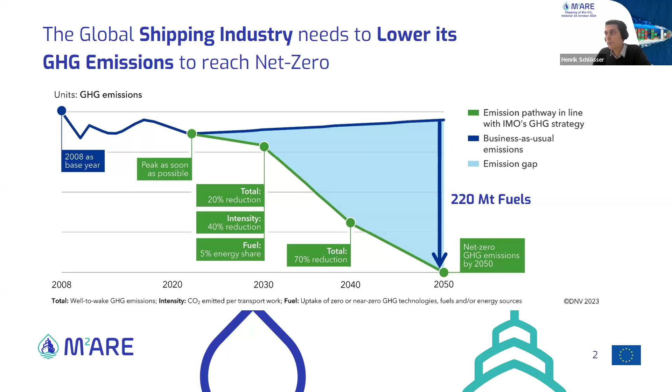And of course, this creates a huge demand for renewable fuels that replace existing fuels based on fossil resources. By 2050, it is estimated that a total of 220 million tons of fuels per year are needed, which creates a huge market for these novel fuels, but also requires the availability of new feedstocks, which are renewable. And we believe that methanol can play a key role here as one of the fuels to be used in the future.

So methanol is a relatively simple molecule, and it has the advantage that it has a much lower environmental risk compared to conventional fuels, so heavy fuel oils or diesel, for example. And by switching to methanol, up to 80% of CO2 emissions can be saved. Currently, we see a stark rise in the interest in methanol. Just 3 years ago in 2021, there were less than 20 ships on order capable of running on methanol, while now there are over 200 ships on order and able to run in the coming years on

methanol. But of course, one of the major challenges for methanol as a maritime fuel is its price, especially for renewable methanol. And there, we think M²ARE comes into play. We want to reduce the cost following this approach. We have partners along the whole value chain, starting from the feedstocks all the way to the final products.

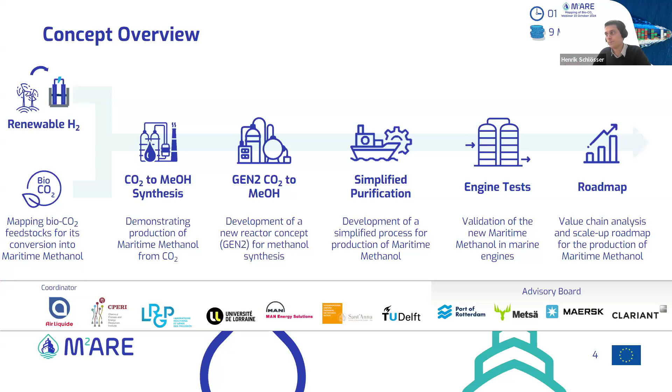And so without further ado, I want to leave the floor to Michael for the in-depth presentation on the biogenic CO2 sources in Europe.

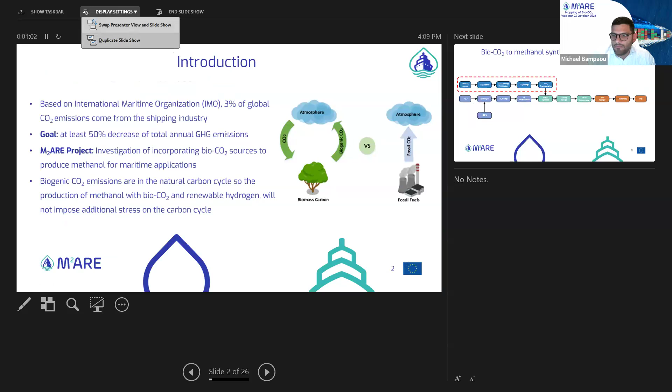Starting now with a brief introduction. So, as also Henrik mentioned previously... Michael, maybe you can switch to the presentation mode. Okay. Yeah, swap presenter view. Now? Yes, great, perfect. Thank you. Great.

Okay, the goal regarding the maritime industry is at least a 50% decrease of the total annual GHG emissions. So the scope of the M2ARE project is to use bio-CO2 in conjunction with renewable hydrogen to produce methanol that could eventually be used in ships. So why biogenic CO2? Because this bio-CO2 is in the natural carbon cycle, so we will not add additional stress to the carbon cycle, contrary to fossil CO2, which adds additional stress to the carbon cycle.

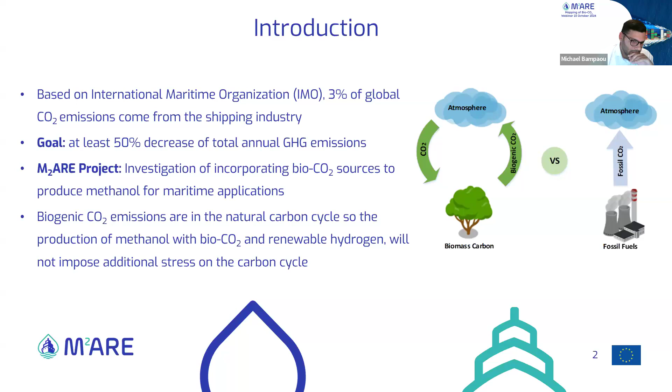So having this in mind, here you can see an overview of the bio-CO2 value chain to methanol synthesis. We have 4 different sections here. We have the bio-CO2 section, on which we are going to focus today, which is about the bio-CO2 emissions, the capture, the cleaning, storage, and then the transportation of the CO2. Then, of course, we have the production of hydrogen using renewable energy sources,

the synthesis of methanol incorporating renewable hydrogen and bio-CO2, and finally, the utilization of methanol in ships. So the port would be, let's say, the end user that is going to use this methanol, so the vessels that are located in the port.

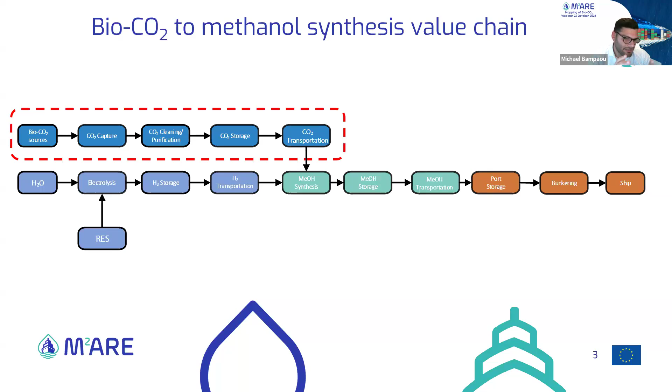So which are the 3 main biomass conversion processes that are generating bio-CO2 mainly as a byproduct? We have 3 here: combustion, digestion, and fermentation. The combustion process involves the combustion of the feedstock to produce heat, electricity, or combined heat and power. There are different solutions for this application, ranging from domestic heating up to district heating and large-scale power generation.

But usually the bio-CO2 streams from the combustion process involve low CO2 contents, lower than 15%. They have high inert contents like oxygen, NOx, SOx, and other traces that are related to the process and the feedstock. The combustion process is the main emission source in the biomass power plant sector, but also in the pulp and paper industry.

The digestion process is a biochemical process that breaks down the organic materials, which is mainly used to produce biogas and digestate, mainly in biogas plants. The feedstocks there could be biomass, organic domestic waste, manure, sludges. This process is particularly suited for biomass feedstocks with high water contents. This sector emits significant quantities of bio-CO2 that remain unexploited, especially in biogas upgrading plants where bio-CO2 is emitted as a byproduct.

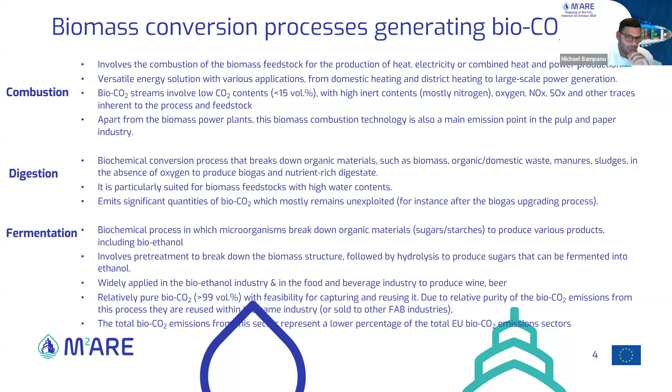Now, seeing also the other aspects of the bio-CO2 value chain, we have 3 different capture methods regarding CO2, which are mainly focused on combustion processes. We have the pre-combustion capture, post-combustion capture, and oxy-combustion. In pre-combustion, you have a preconditioning of the fuel in order to produce CO2 that could be easier captured after the process.

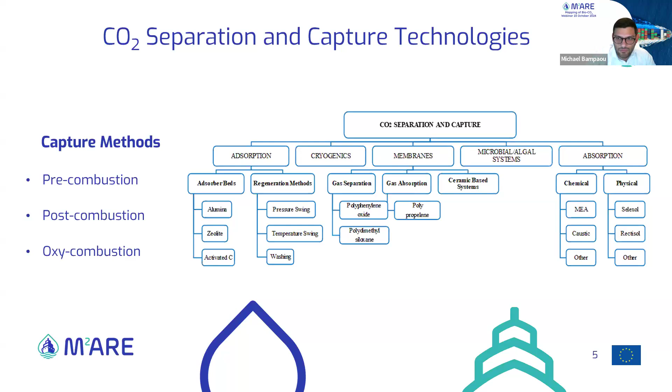In the post-combustion, as already mentioned, we have also other components like NOx, SOx, and also nitrogen and oxygen. And in the oxy-combustion process, the fuel is combusted using almost pure oxygen, which in the end results in a CO2 stream that is relatively easier to capture.

Regarding CO2 storage, the CO2 produced could be either contained in the off gases and stored as off gases in the gas holders within an industry. This is mainly the practice conducted in the iron and steel industry, where off gases are stored there and are either reused within the same industry or utilized in other processes. But it could also be stored as a byproduct or pure CO2 after cleaning.

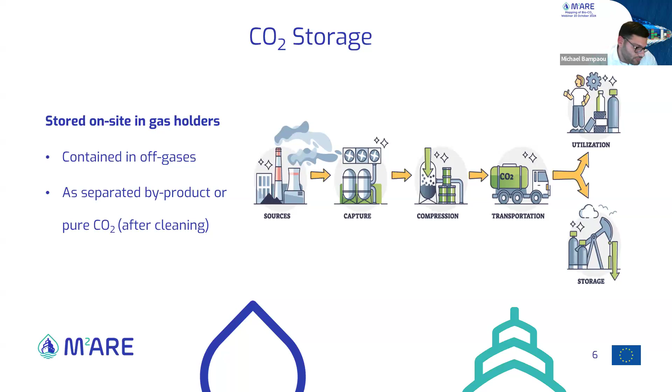CO2 can also be transported as a liquid via shipping, with trucks, with rail, and also as a supercritical fluid via pipelines. So in this case, since the bio-CO2 sites could be located elsewhere other than where the methanol synthesis is conducted or where the methanol end user is, you need to transport this CO2 to a particular location where it could then be used.

Also, continuing with a general introduction about the potential impurities and effects of those impurities that could be contained within those bio-CO2 sources. There are different compounds and elements that could be included in those bio-CO2 streams that could harm the methanol synthesis catalysts, but also the equipment used there. For instance, we have halides, hydrogen chloride, that could result in catalyst poisoning, corrosion, and also the risk of forming toxic byproducts that could affect the operation of the system.

We have siloxanes that are mainly apparent in biogas plants. It could result in the fouling of emission control systems and also decrease the lifespan of the equipment. Oxygen, for instance, in biomass combustion processes could cause corrosion and safety issues, but also catalyst poisoning effects. Also, of course, trace elements and heavy metals, which could be related to the used biomass feedstock. For example, zinc and lead that could cause corrosion and fouling problems. Also, lead and chromium, which are also hazardous to human health and the environment.

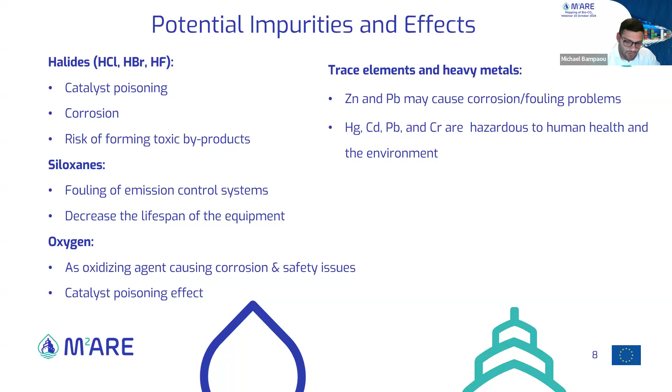So, when designing the complete bio-CO2 value chain, provision has to be taken for those impurities in order to protect the catalyst and the process. Also, we have water and moisture, which can result in catalyst deactivation due to the crystallization of the particles of the catalyst. And in the methanol synthesis process, water can hinder the thermodynamics by shifting the reaction towards the reactants, so it could hinder the methanol yields.

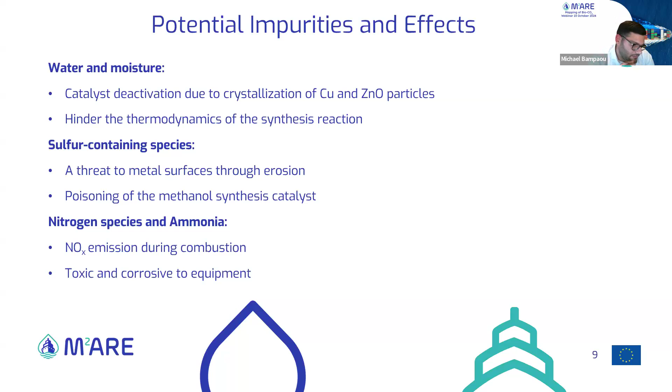Sulfur-containing species are also a threat to metal surfaces through erosion and could also result in the poisoning of the methanol synthesis catalyst. And finally, nitrogen species and ammonia, the NOx emissions during combustion, which are, of course, toxic and corrosive to equipment, along with ammonia in those processes.

So, which sources have we actually investigated so far in this project? We have the biogas plants, biomass power plants, pulp and paper plants, bioethanol, and the food and beverage industry. We have also done a first investigation of direct air capture, and for comparison, we have also studied fossil sources in order to compare them with bio-CO2 and see what the challenges are and what best practice could be adopted in the bio-CO2 sector.

So since those sectors are heterogeneous and involve different upstream processes, we needed to develop a methodology in order to compare and assess those bio-CO2 sectors. For instance, the aspects that we studied are related to the total sector CO2 emissions. So what are the total emissions of each bio-CO2 sector in Europe and its contribution to the overall emissions. This value will provide an indication of which sectors contribute the most to EU bio-CO2 emissions and assess the impact we can achieve by utilizing those bio-CO2 for methanol.

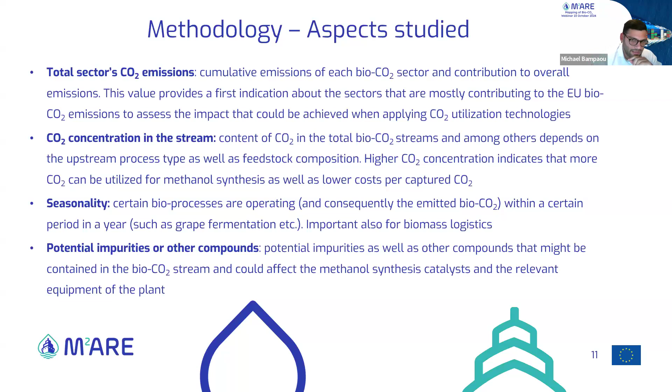Also, the potential impurities. So which are the impurities and the other compounds that are included in the stream and which could affect the synthesis catalyst, and also the relevant equipment that are applied there. So in order to clean the bio-CO2 that will be eventually used for methanol synthesis in order to protect the catalyst. Very important is also the current uses of the bio-CO2. So the bio-CO2 could be stored, it could be reused in other applications, for instance, within the bioethanol industry or the food and beverage industry, or it could be released to the atmosphere.

Very important is also the bio-CO2 emission points within the plant. So bio-CO2 could be also emitted at different points within a particular plant. For instance, in biogas plants, CO2 could be produced, could be included within the biogas stream, could be also included in high concentrations in biogas upgrading plants. And also in other processes where biogas is combusted to generate electricity or heat, the CO2 concentration there is lower. So there could be different points of CO2 emissions within a particular sector.

And also very important is the geographical distribution and the emissions per plant. So those plants could be geographically distributed across different locations, and each sector could have different CO2 emissions per plant. So higher emissions with lower emissions per plant indicates a more decentralized nature of the sector. So it would be challenging to achieve economies of scale there. And in comparison with fossil industries, this is also a characteristic of the bio-CO2 sector.

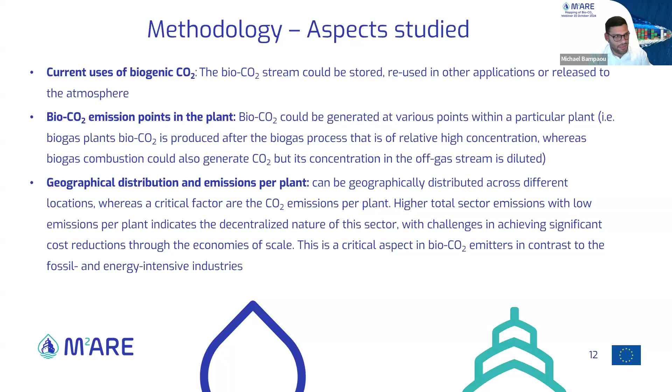So starting now with the biogas and biogas upgrading plants. So the total emissions, as we have actually reviewed the available data, would range from approximately 24 megatons of bio-CO2 per year. And the purity of the CO2 could range from 25 to 50% within the biogas, but it is almost pure in processes that involve biogas upgrading plants. There are different emission points, as we also mentioned earlier. So from what we've seen, a very feasible aspect is utilizing the bio-CO2 after the biogas upgrading process, which is almost pure. But the other processes involve also capturing it after the CHP unit or in the biohydrogen production unit, which are, let's say, less frequently applied processes.

So the distribution of the emissions in biogas plants: in general, there are small emissions per plant, and there is a large geographical distribution since biogas plants, due to odor issues, for instance, are located in the countryside. So the bio-CO2 should be transported to a location or utilized on site, but it will be difficult to achieve economies of scale within one biogas plant. And the current uses of this bio-CO2, for instance after the biogas upgrading sector, it is mainly released to the atmosphere. And the seasonality in the sector is related to the used feedstock, but in general, biogas plants apply feedstock flexibility in order to achieve constant production rates throughout the year.

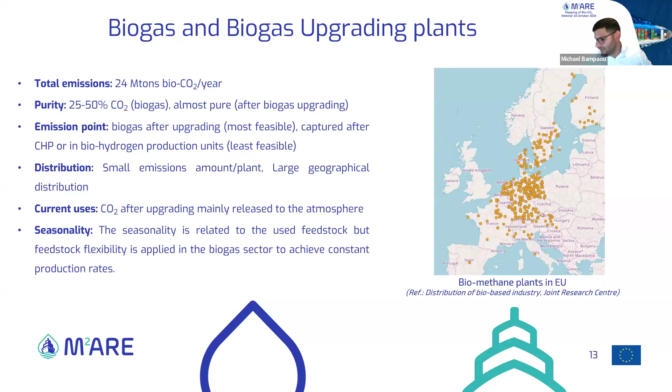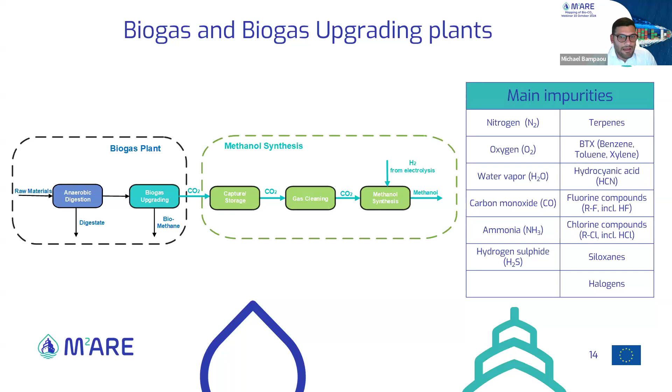Continuing now with the biomass power plants, there's a large distribution in the available data from what we've seen in literature. So it could range from 220 to 310 megatons of bio-CO2 per year. The emission point there is post-combustion, and the purity of the bio-CO2 could be approximately up to 12%, in some cases more or less, but the CO2 there is more diluted compared to other sectors. There are also large distributions in terms of the emission amounts per plant, and a large geographical distribution. The current CO2 uses there, it's mainly also released to the atmosphere. And the seasonality aspects are related to the used feedstock, but also the operational use, for instance for district heating, which is related to the heating season in its location.

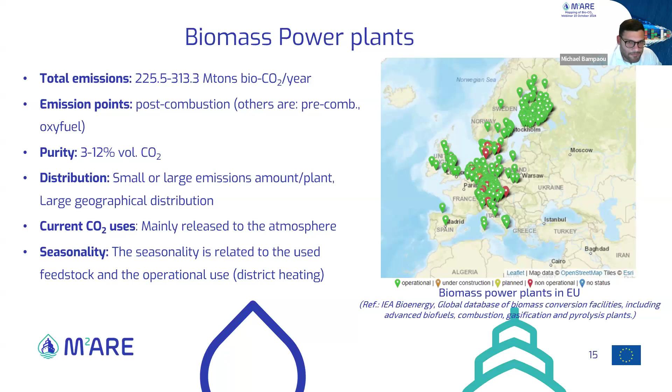The integration of methanol synthesis there: for instance, after combustion, CO2 should be captured, stored, also cleaned, and then used in the methanol synthesis plant. There we have also the impurities that could be NOx, sulfur dioxides, heavy metals, dust, and other compounds that should also be taken into consideration when using it within the methanol synthesis process.

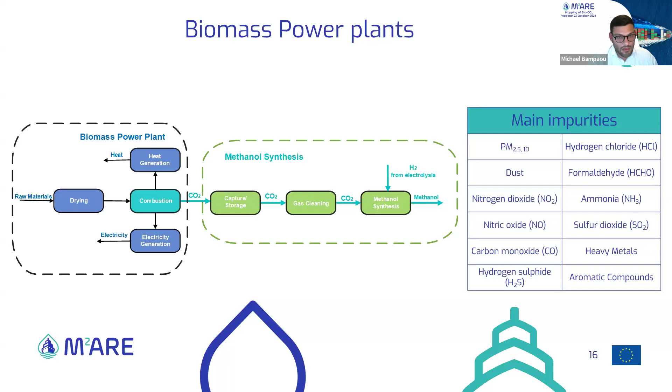Pulp and paper plants are also a sector that largely contributes to the total bio-CO2 emissions. The total emissions are around 90 megatons of bio-CO2 per year. The emission points there could also be post-combustion. The combustion process is mainly the main factor affecting the emissions within the pulp and paper industry. So we have the lime kiln, the recovery boilers, and power boilers that are emitting bio-CO2 and are using different kinds of bio feedstocks, which could eventually be used in our case.

As you will see in the table, there are different CO2 concentration ranges that are emitted from those points in the plant. There's also a large geographical distribution of the sector, but most of the plants are located in Scandinavia. Sweden, for instance, has a large pulp and paper industry. There are also no fixed uses of this bio-CO2, and there are no strong variations expected due to seasonality in this sector.

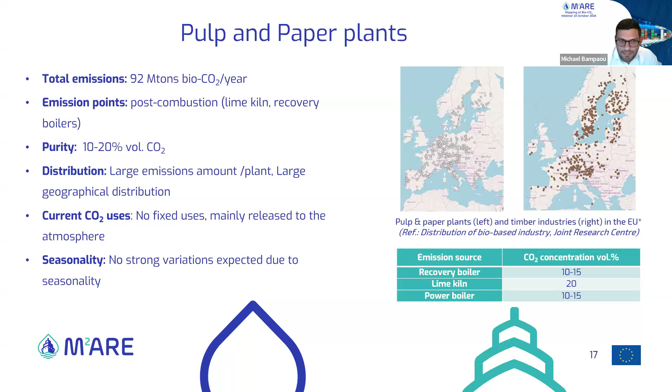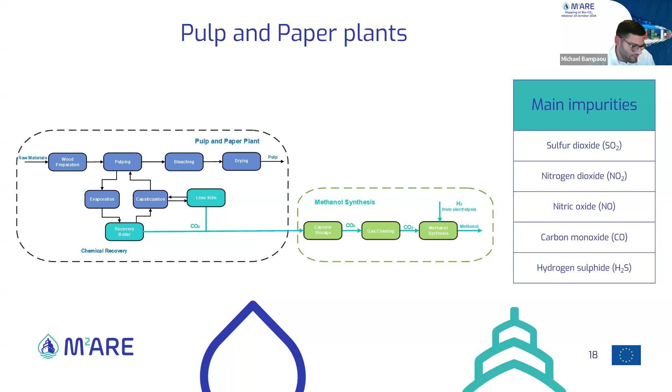In the map, you can see the pulp and paper plants on the left side, and also the timber industries affiliated to the pulp and paper plants, which is a map by the Joint Research Center about the bio-based industries. In the next slide, there is a potential integration proposal for CO2 methanol synthesis from bio-CO2 from these sectors. And in comparison with the biomass combustion plants, we have nitrogen oxides, sulfur oxides, and other compounds that could be related to the upstream process and to the feedstock used in those processes.

Bioethanol plants are not contributing to the total emissions of the EU to a large extent. The total emissions are estimated at approximately 4.3 megatons per year, and the emission points are after fermentation. So the purity in those streams is very high, from 99 to 100% volumetric CO2, but the emissions per plant are small, and there is a large geographical distribution of those plants. So due to these small emissions per plant, achieving higher economies of scale would be challenging in terms of CO2 logistics.

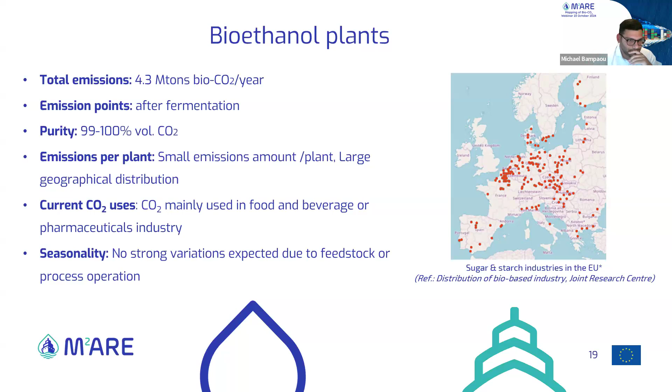Currently, the CO2 in bioethanol plants is mainly used in the food and beverage industry, or could also be used in the pharmaceuticals industry. There are no strong variations expected due to the feedstock or the process operation of the sector. In the map, you can see the sugar and starch industry in the EU, which is related to the bioethanol sector. In this case, CO2 could also be used due to its high purity. It could be integrated within the methanol synthesis process to produce methanol.

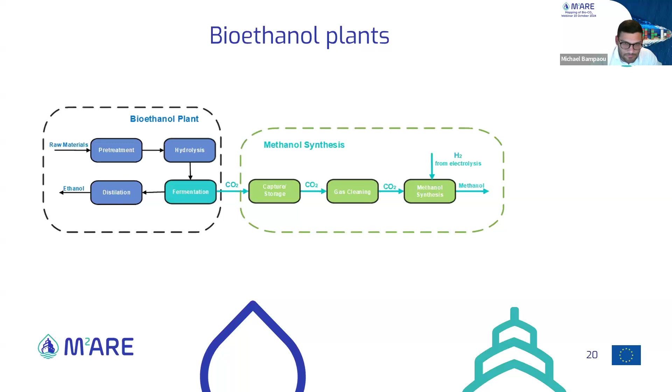And finally, the food and beverage industry, mainly the beverage industry. It does not have a large contribution to the total CO2 emissions. The process there is also fermentation, for instance in the wine and beer producing sectors. We have small emissions per plant and a large geographical distribution. The CO2 produced there can be reused within the industry, sold to other food and beverage industries, or released to the atmosphere.

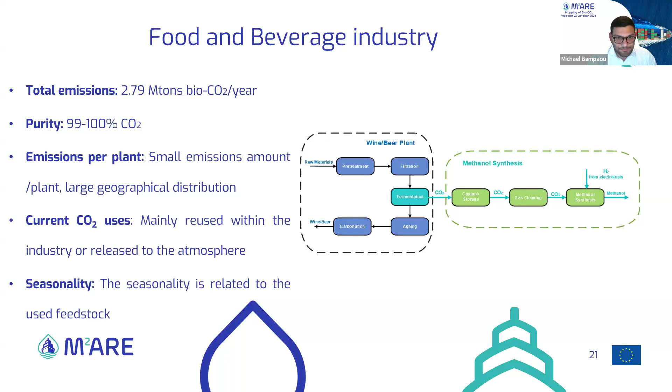The seasonality is related to the feedstock used, but also to the end product, for instance wine and beer, where the fermentation process and, for instance, the grape harvesting season could differ. Finally, we also included a first outline of direct air capture.

The solution, since most capture plants can capture up to 90% of emissions, the remaining CO2 could eventually enter the atmosphere. Direct air capture systems could also employ various sorbents to capture CO2 from the atmosphere, and this can theoretically be applied anywhere. In terms of bio-CO2, which also has a critical location aspect, direct air capture could provide a solution here.

The CO2 produced there is up to 95% pure, and can be stored underground or utilized for other chemicals and fuels such as methanol. But there are also challenges: high energy consumption and costs for direct air capture, and large-scale direct air capture implementation up to now is limited.

But we have some very interesting examples, for instance in Iceland, where there is a direct air capture plant that captures up to 4,000 tons of CO2 per year, which could provide some more solutions in this sector.

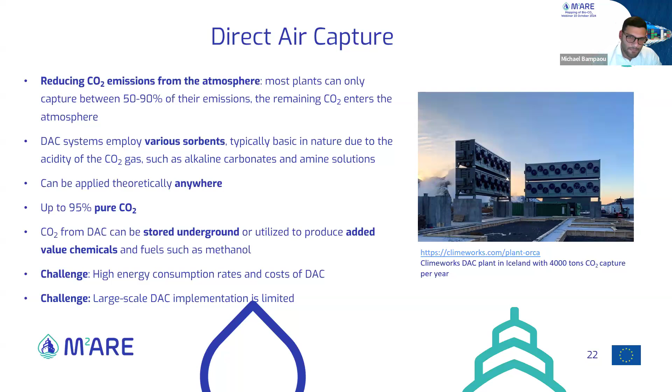Going now to the conclusions and discussion. As we have seen, the bio-CO2 sector represents a highly distributed sector in terms of emissions, compositions, and locations. The biogas sector is promising, especially biogas upgrading plants, because the bio-CO2 there is almost pure. But biogas plant locations are dispersed, which could affect the logistics of the methanol synthesis units.

Biomass power plants and pulp and paper are less distributed. There are large bio-CO2 emitters, but the CO2 stream there is highly diluted, and it will require the application of CO2 capture technologies, which due to the purity of the CO2 stream could also affect the costs.

The fermentation-related sectors, such as bioethanol and the food and beverage industries, produce a highly pure bio-CO2 stream, but in certain cases this stream is reused within the same industry or sold as a market product. This could highlight a lower potential for using this bio-CO2 for methanol synthesis.

Very importantly, biomass feedstock impurities are a critical aspect of the composition. They could exist in different forms and compounds, and could eventually harm the methanol synthesis catalyst. So in this case, you need to clean the bio-CO2 stream that will be used for methanol synthesis.

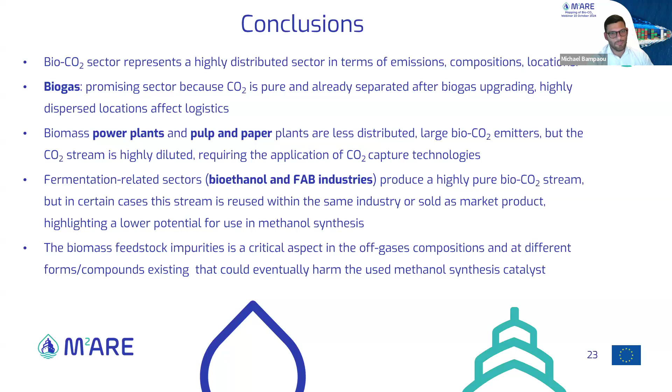So overall, some considerations about the bio-CO2 to methanol value chain. Very important is the location of the plants: the CO2 emission plants, where the hydrogen production plant is located, the methanol synthesis plant, and the end user, which in this case is located within ports. Also important is the geographic dispersion of the plants and the emissions per plant.

Very important is also the cost and feasibility of applying CO2 capture technologies, in order to achieve economies of scale, and the CO2 purity can also affect the application of the CO2 capture technologies.

Impurities in the bio-CO2 streams, as mentioned, require us to clean the gas before synthesis. The CO2 content in the stream can affect the partial pressures and the stoichiometric number in the methanol synthesis process. This means higher hydrogen requirements and higher costs and electrolyzer capacity required to produce the same amount of methanol.

And also what you need to take into account is the end user requirements: what are the impurities and compositions of the methanol that will be eventually used in the ship engine, and to what extent should you purify the methanol product before inserting it into the vessel.